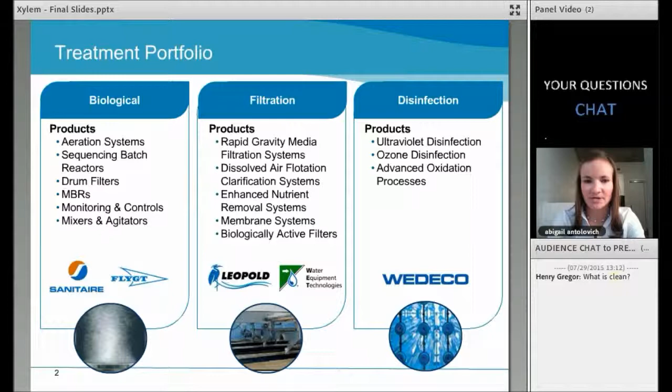So that is all Xylem focuses on: how to transport, treat, and test water. Today I'm going to be talking about our treatment portfolio, which incorporates a number of different solutions applicable for industrial water reuse. We've got everything from biological treatment, which is usually the secondary step in the process—I'm guessing a number of the attendees today are very familiar with that, probably have biological treatment systems themselves. I'll also talk about some of our filtration and tertiary treatment, and how advanced treatments such as disinfection and advanced oxidation are playing into water reuse applications today, and how all of these trains might fit together for meeting certain water quality requirements in the treatment process.

So just quickly, I want to cover a little bit about Xylem's approach to fostering water reuse projects. We have a number of areas. The beauty of Xylem is, as I mentioned, we've got a broad portfolio of technologies. So we've got the process integration expertise to look at an entire wastewater treatment system and figure out the best places to either tweak it—whether with monitoring devices, testing devices, or additional treatment processes—to help improve the efficiency or improve the water quality coming out of a wastewater treatment system. So there's a lot of focus right now within Xylem on optimization for existing facilities.

And then in addition to that, for facilities that are looking to improve water quality, perhaps for reuse—whether it be for industrial reuse or for reusing water for drinking water supplies—we also have advanced technologies to help foster that as well.

A lot of focus right now is on efficiency. I imagine that many of the attendees on the line are looking a lot at efficiency. The water-energy nexus is becoming a big topic right now.

So looking at life cycle costs, where we can make efficient water treatment processes while minimizing the energy consumption going into treating the water, is a key area that Xylem is focused on right now with a lot of our controls and optimization systems.

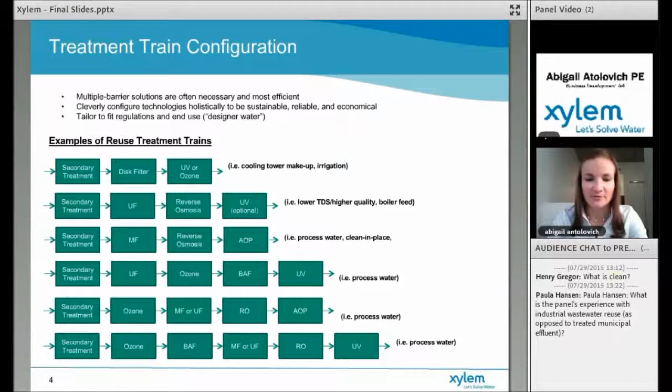So I just want to quickly step through each of the different types of treatments that were on that last slide and talk about where Xylem plays into those facilities as well.

Biological treatment is typically considered secondary treatment in most wastewater facilities. I'm guessing a number of people on the phone have experience either running or designing biological treatment systems. It's usually used for bulk removal of contaminants like organics and nutrients. The best kind of biological treatment process is going to be site-specific depending on what footprint is available, what kind of energy consumption somebody is looking to minimize, and also what kind of downstream and upstream treatment processes they may have.

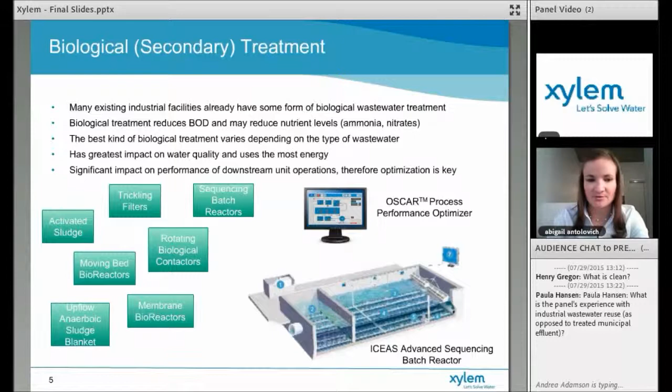And then in the context of energy efficiency and process optimization, Xylem also has an OSCAR Process Performance Optimizer package. Xylem offers a number of control and monitoring systems, and so when we're looking at biological treatment facilities, particularly ones that require aeration that consume energy, this is an interesting available process to consider for optimizing energy consumption.

Tertiary treatment usually involves some sort of filtration or disinfection. Again, this can range from loose membranes like microfiltration membranes or disc filters, and then you might look at either chlorine or ultraviolet light to do some disinfection there.

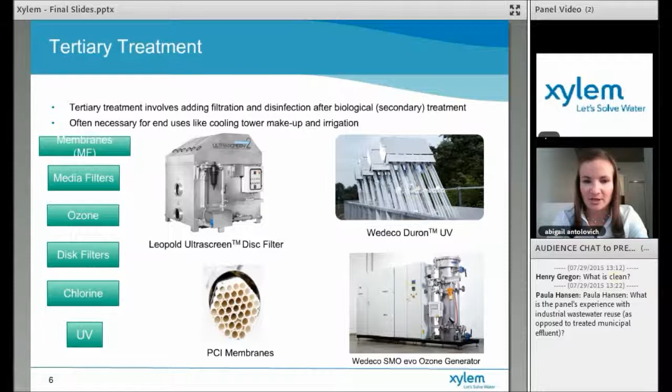Again, Xylem brings a number of offerings to the table here. We have recently launched the Leopold UltraScreen disc filter that has a very long-standing history, particularly in Europe, for industrial applications for solids removal. The Wedeco Duron UV system is a brand new offering as well, designed to help minimize operational issues when it comes to cleaning and replacing the UV lamps. We've got our membrane lineup and also some ozone generation systems through Wedeco.

Finally, on the advanced treatment side of things, Xylem offers a couple of advanced facilities. One is, although it's a traditionally used process step, ozone plus biologically active filtration, and what Xylem has done with its years of process experience and treatment technology expertise is incorporate those two processes together into a process optimization package. We also have pilot test facilities.

We have something called the MiPRO pilot test unit that is used for customers to evaluate different types of advanced oxidation. So when people are looking at advanced treatment, it can range from advanced oxidation to reverse osmosis membranes, or combinations of these two. And if I could ask, we've got a couple of quick videos that go through these, if you could cue those, that would be great.

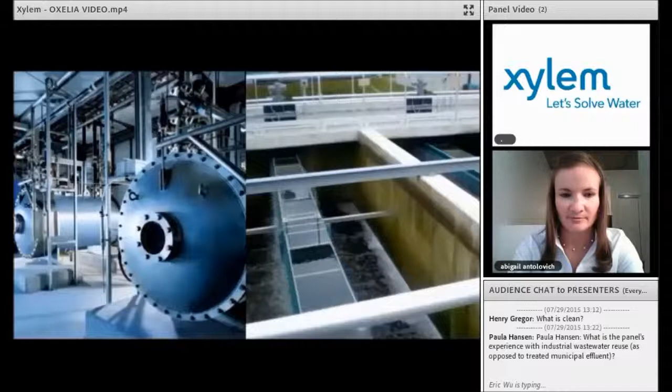The Leopold Oxelia Ozone-Enhanced Biologically Active Filtration System combines the treatment synergy of ozone oxidation and biologically active filtration into a single process solution. This powerful multi-barrier system reduces pathogens and destroys previously difficult-to-treat contaminants.

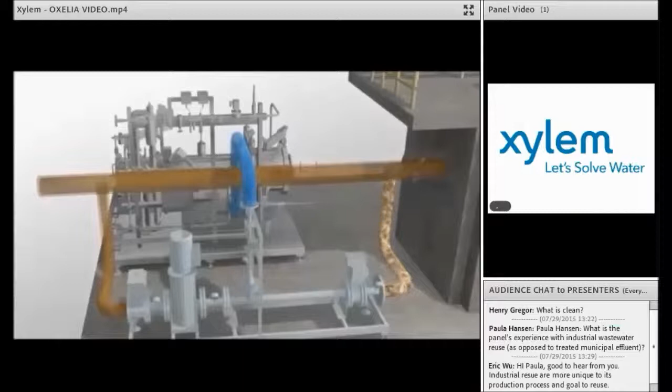How does the Oxelia system destroy these contaminants? Wastewater is first dosed with the precise amount of ozone, based on flow rate and water quality, to meet the oxidation demand and the treatment objectives. The ozonated water then flows through a baffled contact chamber, ensuring adequate contact time for the ozone to disinfect the water and oxidize most of the trace organic contaminants.

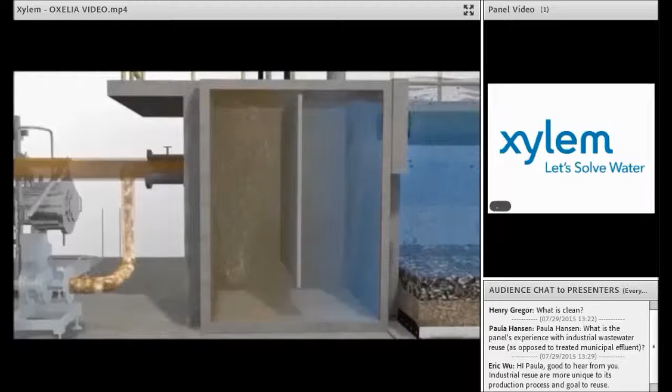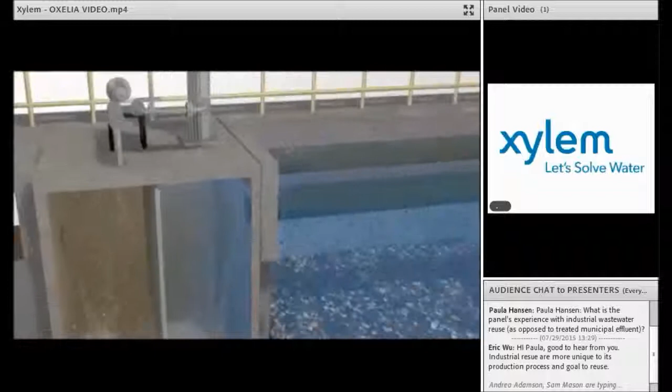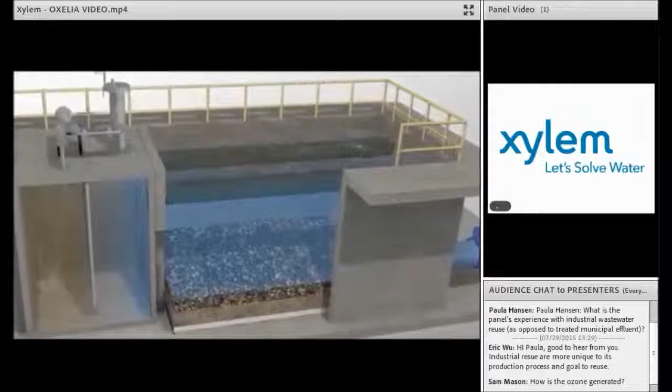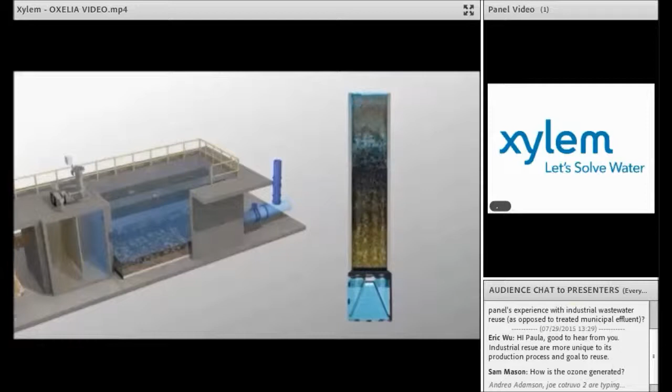Ozone's powerful oxidation breaks the chemical bonds of pharmaceuticals, industrial chemicals, pesticides, and endocrine disruptors, making these substances biologically degradable. The wastewater, with these partially oxidized organics, is then filtered by a biologically active filtration system using the filter media to support an attached growth biomass. The microorganisms growing within the filter media consume and destroy the organics and oxidation byproducts, removing them from the water stream. The active biomass also reduces the remaining BOD and ammonia, and the filtration process traps total suspended solids, increasing the UV transmittance of the effluent stream.

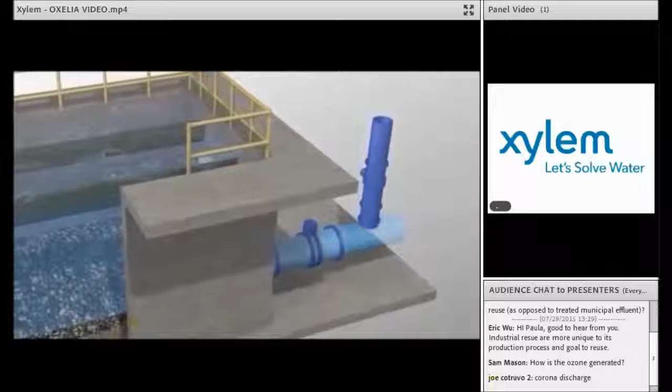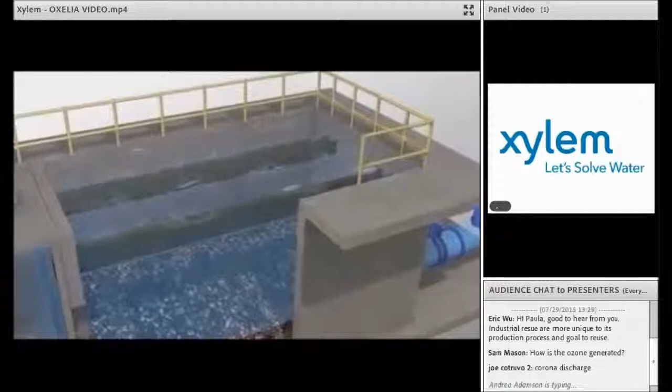The Oxelia Ozone-Enhanced Biologically Active Filtration System produces a cleaner and safer final effluent, low in total organic carbon and extremely low in turbidity. The system destroys harmful pathogens, leaving no chemical residuals or disinfection byproducts, making the filtered water suitable for many reuse applications, or for discharge into the most sensitive ecosystem. And because contaminants are destroyed and not just concentrated, the backwash stream can be recycled to a plant's headworks or even be processed with solid handling equipment.

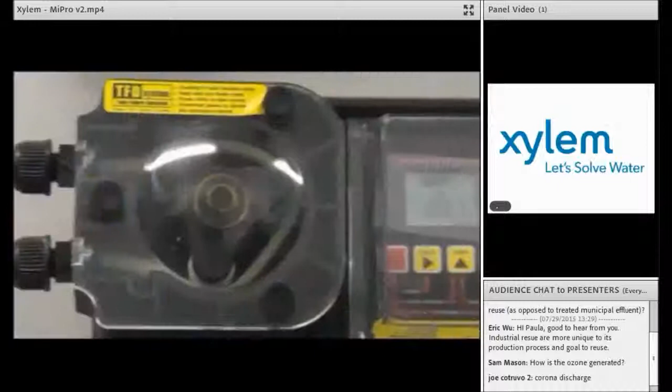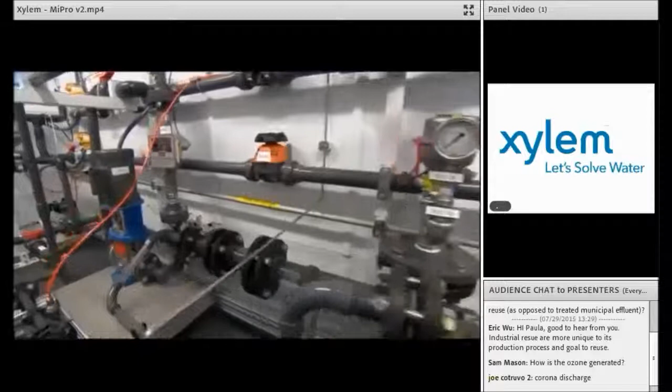MiPro AOP pilot container is very versatile and can be tailored to each project's specific requirements to evaluate a number of different treatment processes. Xylem's portable container is easy to use, manually or fully automated, with real-time monitoring for your testing needs. It's got the ability to use ozone, UV, or peroxide, and pretty much any combination of those. We just make sure that we set all the set points and the doses to where we want them to test what we want, and we can just leave it.

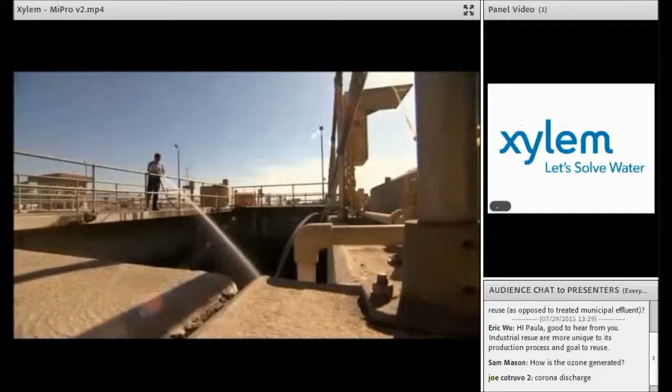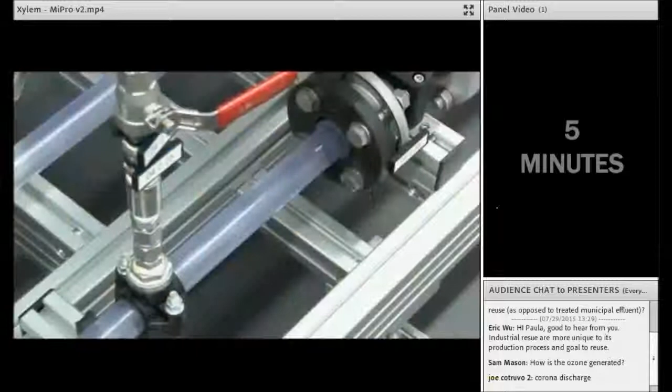At Xylem, we know that stringent requirements demand wastewater to be free of more pathogens and trace contaminants than ever before. That's why Xylem has created this sophisticated pilot test system with the most advanced water treatment technologies available today, all in one container. The MiPro AOP pilot container is valuable for the customer because it allows them to quickly and efficiently evaluate multiple treatment processes within one system.

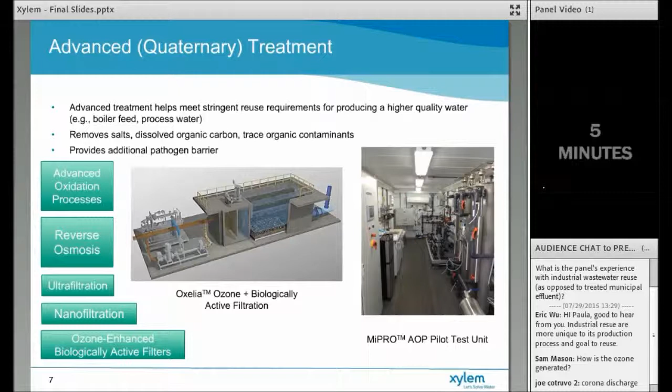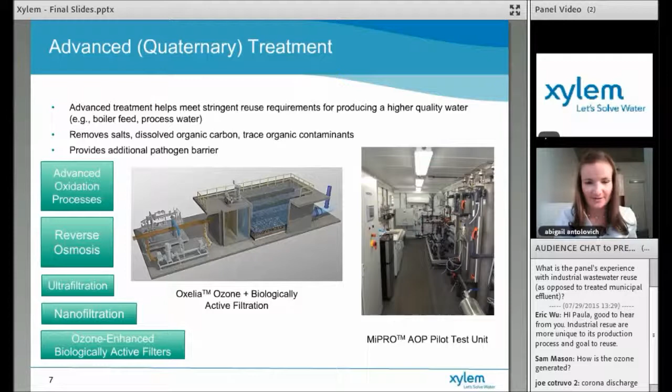All right, thanks for rolling those videos. Can everyone hear me back again? Yeah, we got you. Some of our presenters need to mute their mic, or I think it went away. Fine, there was an echo, but we're fine.

Go ahead, Abigail. One of the things raised from the panelists when we started this discussion was a comparison of treatment costs. While it's a little hard to talk specifics without a specific project in mind, I wanted to cover the comparison between, for example, some biological treatment processes and oxidation technologies, looking at things like footprint, installation costs, and operating costs. This table gives a relative idea of where all those different technologies sit and other considerations for manufacturers thinking about installing different types of processes.

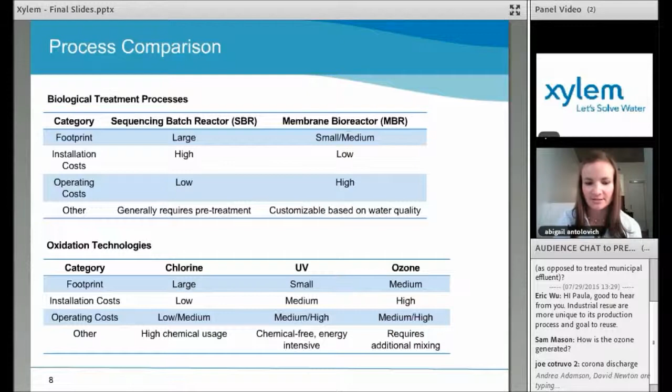I wanted to run through a few case studies where Xylem has implemented some industrial water reuse facilities. The first one is a raisin producer. This one was producing wastewater that had a lot of dust, sugar, and other contaminants from the raisins. They were looking at transportation costs around $50,000 per month to a municipal treatment plant, and one of the things they wanted to do was look at reusing that wastewater. What they decided to do was install a membrane filtration system to clean the water and then reuse it for washing or irrigating in the nearby vineyards.

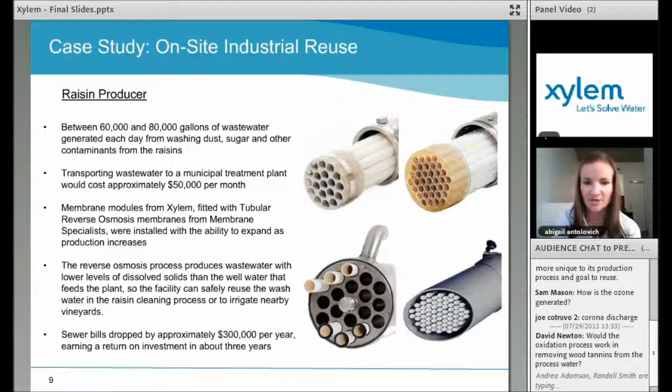In order to do this, they used membranes from membrane specialists, and then Xylem helped support the project by fitting out the membrane modules with tubular reverse osmosis membranes. The really great thing about this project from a financial standpoint is that it was able to decrease their sewer bills about $300,000 per year, which gave them a return on investment of just under 3 years, which is pretty good for industrial reuse projects. So that's just one example of where membranes have been used in a food manufacturing facility.

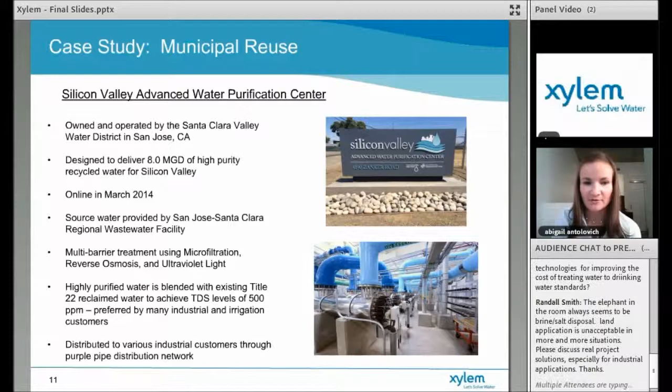The final one is in Silicon Valley. It is operated by the Santa Clara Valley Water District in San Jose, and although this is a municipal treatment plant, they send a lot of their water to the local high-tech industries in the valley to be used for irrigation, cooling tower makeup, and a number of other non-potable processes. This uses microfiltration, reverse osmosis, and UV systems provided by Xylem to help treat the wastewater.

So finally, what Xylem is offering to bring to the table to help industrial manufacturers is really a partner to do treatability testing all the way from installation and selection to aftermarket. As I mentioned, we have a number of installations both domestically and across the globe to help with our expertise. We can provide a single source of support with the variety of treatment technologies and monitoring equipment that we offer, as well as process performance guarantees and aftermarket services. So that's all I had on what Xylem brings to the table, and again, just setting the stage for the different types of technologies. I will turn it back over, and we'll move on. Thank you.

Thank you, and panel, can you join us again please? Thanks, Abigail, stick around. We're going to ask the panel. Panel, while we're waiting for your cameras to show up... well, there you are. So Eric, why don't you lead off? Any questions or concerns for Abigail?